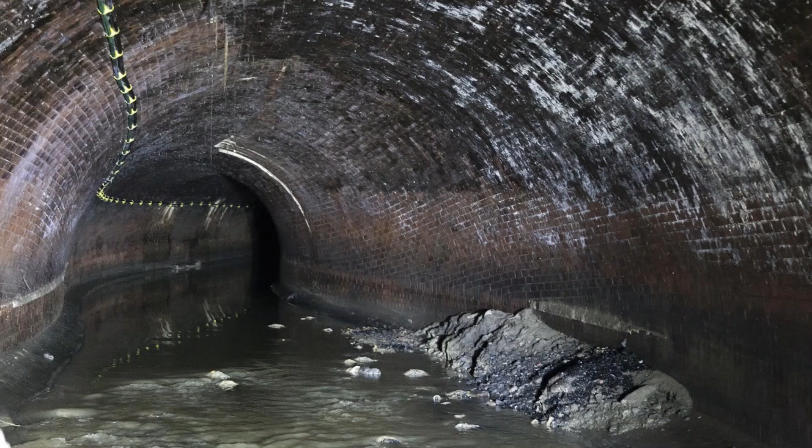Great. What about the Tideway project then? Can you tell us something about that and what your role in that project is? Yeah, of course. So this is what we're actually talking about. It doesn't look too glamorous from this shot, but these are the original sewers that currently sit underneath London and carry the waste out through into the Thames.

The Tideway project itself is a large exercise to replace the existing Victorian sewers, which were actually created back in 1858 by Sir Joseph Bazalgette. It's the same sewers that were put in then, following the Great Stink of London in 1858, when London was actually home to about 2 million people. Now, when the original sewers were designed, Bazalgette had the foresight and he created them for a population about twice that size, about 4 million people. We're now at 9 million.

The sewers have reached capacity, and this whole project is about replacing the original sewers that you see here below ground level, feeding out into the Thames, taking them down through a series of drop shafts and out through a tunnel below the Thames as part of the effort to clean up the whole area and return the Thames to a previous enjoyable state, is the way I'll put it. It's actually 25 kilometres of tunnel that stretch across the whole of London, carrying tens of millions of tonnes out and across into the outfall at the end of the Thames.

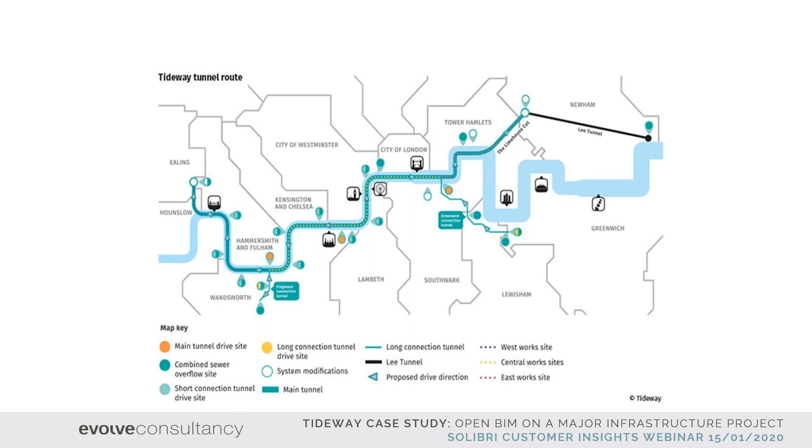It's actually divided into 24 work sites, and it's being run by 3 major works contracts. We've got a team over in the west, in the central and the east, and then also systems integration as well. So there's a lot of work going on. In terms of time frame, you can see it's got a long way to go. Construction started back in 2016. We're about here now, about 2020. So through construction, we're actually about halfway through, but there's a lot more work to go on afterwards.

By the time we get to 2022, we start the system commissioning, and in 2024, the work's completed, and actually there's a handover from the main works contractors to Tideway at the start of a 3-year period of Tideway's responsibility to maintain the assets and then Thames Water to actually operate them. The final handover of assets to Thames Water doesn't actually take place till 2027. So there's an awful lot of work left to do yet. It's a very time-consuming project. Yeah, but very interesting as well.

So you have this open BIM approach in your project. What does that mean? How do you utilize this open BIM? Yeah, so from the start, we were involved before 2016 in this. We had to look at the way the information was going to be delivered. Now, before we even start talking about open BIM, it's worth just a consideration of the size of information that we are dealing with. On the client Tideway server itself at the moment, there are over 175,000 documents, which equates to around about 1.5 terabytes of data. That's just the Tideway CDE.

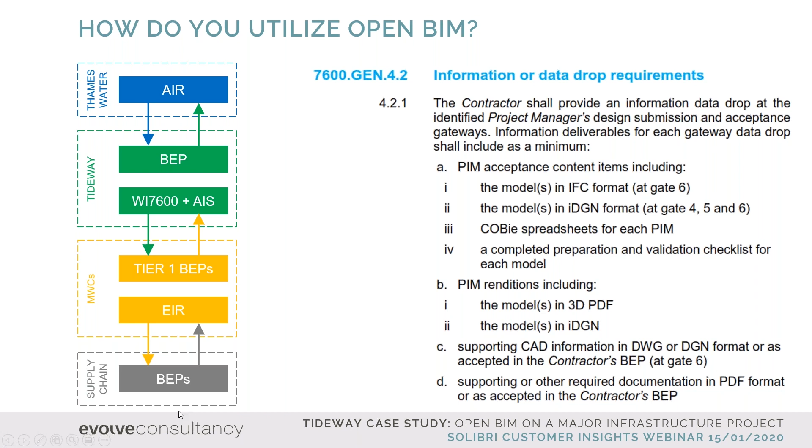Hence, we decided on IFC COBie because they are open ISO standards, and that's one of the more important things that we dealt with. We needed them to be backed by an international standard. So here's an extract from the Works Information 7600 itself, which actually describes that very quickly, and also brings into account 3D PDFs so that people who don't have the technology to understand the IFC and COBie formats can still interpret the information.

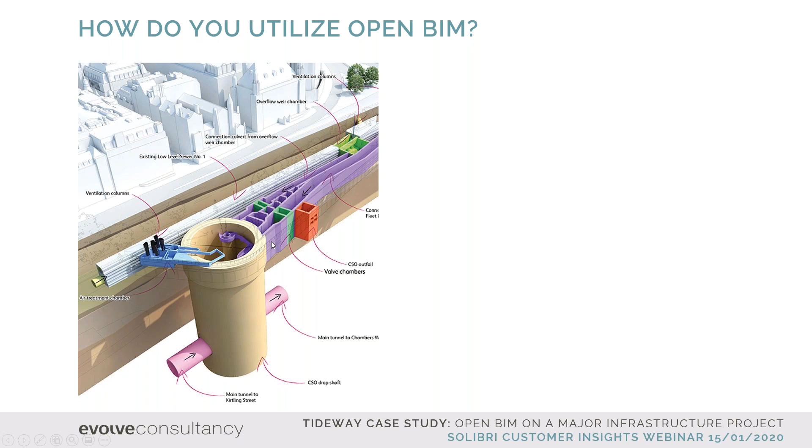Now, at this point, we started to get concerns raised back. You've all heard them, I'm sure. IFC is not suitable for infrastructure. Our software can't export IFC. IFC does not support complex geometry. IFC was designed for vertical construction. Well, in terms of what we're asking for, if we look at the project, we'll see it's actually a series of concrete structures and drainage systems.

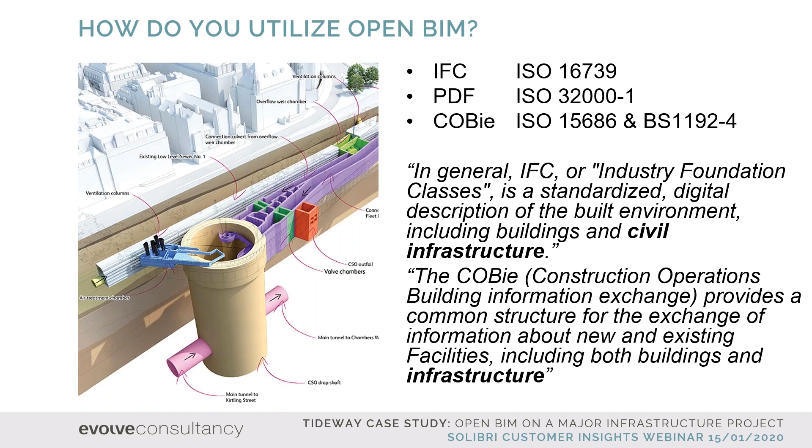And in fact, when we look back at this, the first thing we identified was that these are international standards and they are actually designed for more than just buildings. They're also intended, and these are definitions from the IFC and from COBie themselves, clearly for those types of projects. We actually did look at this, and it's interesting to note that inside of IFC there are 12 building element types, but 56 distribution elements.

And that's what we're talking about here. It is just a series of structures and a distribution system. Admittedly, it's a very large distribution system, but in the end, it is just IFC flow segments, IFC flow controllers, IFC walls. I'll translate that. That's pipes, valves, and walls.

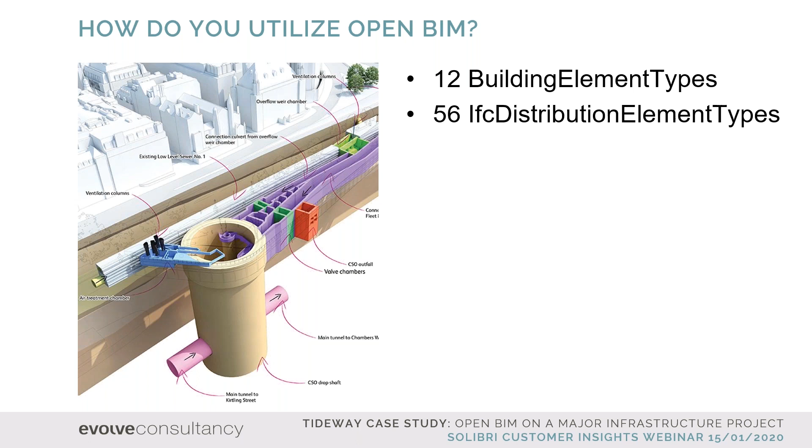Okay. So how about Solibri? In which phases of the project do you use it, and how do you use it in the project? Well, we've been using Solibri throughout the project to look at data and to analyze it. But as we've moved into construction and we're aiming now towards Gate 6 handover, that's when we're really talking about stepping up the pace and looking at validation and verification of models that are being issued to us. We're working on the client side. We need to make sure that the model information being delivered matches the documentation and particularly the asset registers that are coming in.

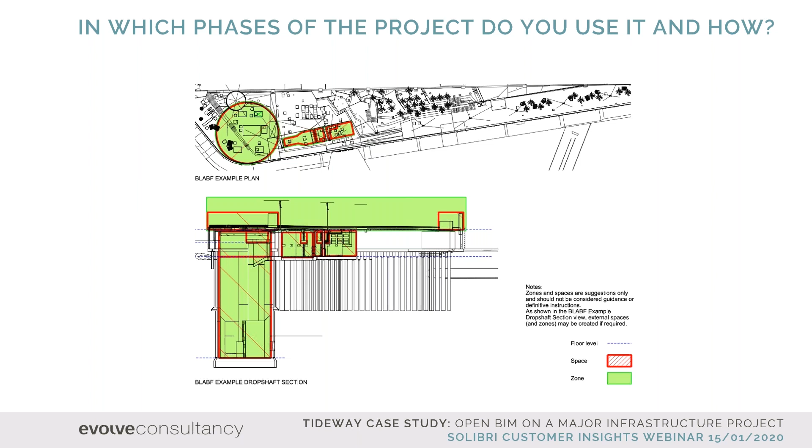Now, what we did to do that is we've broken down each of the sites into zones, spaces, floors to help it. What we could have done is just turned around to the whole project and said, there's your requirements, get on and do it. But we've realized that working towards a common aim is going to get the best for everybody. So what the client Tideway has done is produce a series of documents that help people understand how the information should be structured, not just information requirements, but guides on how we would hope the information is put together.

We're not having problems with coordinates on this project. That's one thing that we got to the bottom of right at the start, but moving through the project now, how the models are structured, how the IFC information is structured, and finally how information is going to be handed over at Gate 6, that's the important part for us.

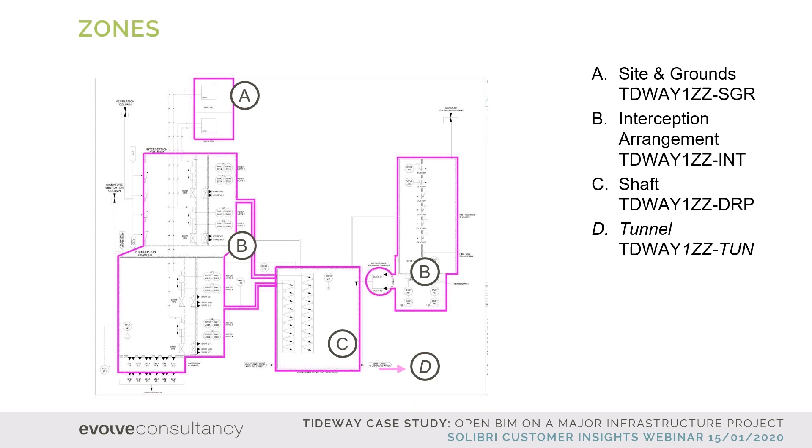This is what's important. It's the structure of the data, not necessarily the tools that have been used to produce it. So what we've been doing is working with the main works contractors, everybody involved in the project, to try and identify where things can be achieved and where things have been a little more difficult, and working through those problems. I'll talk a bit more about the process, the way we did that later, but to us, we took the original systems diagrams and we looked at them, and the way they break down into IFC structures in COBie is actually fairly straightforward when you review them in this way.

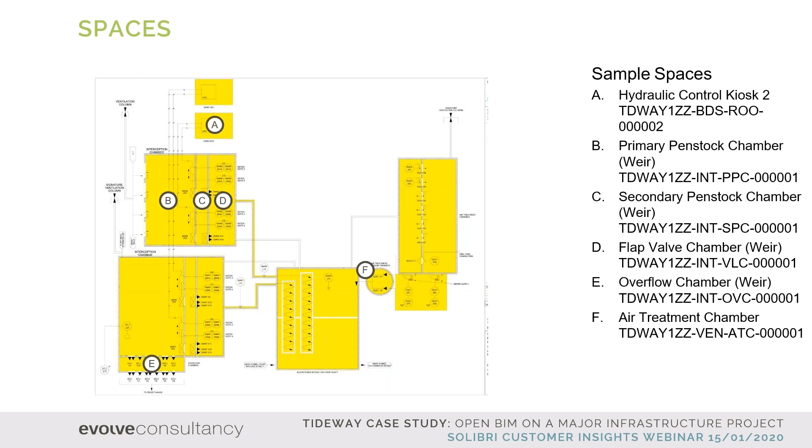This is work that we did as part of an internal review to see whether this approach was actually pragmatically possible, all the way down to the final components that actually sit in the project and are identified through the spaces. We moved on from that then, and we're starting to look now at how the asset tags need to be formalized, and making sure that they can be identified consistently across all the sites and all the main works contractors.

Now, the way we've done that is built a series of guides, as I've said, and tried to be as transparent as possible with the compliance checks that are going to be run on the project, so that they can be reviewed up front and the information that comes into us is as complete and as successful as possible. Here's an excerpt of the workflow that the models are going through. And here are just some of the validation checks that we're doing, which are a simple yes, no answer. Has the information been received? Is there evidence of the validation carried out before the information comes into us?

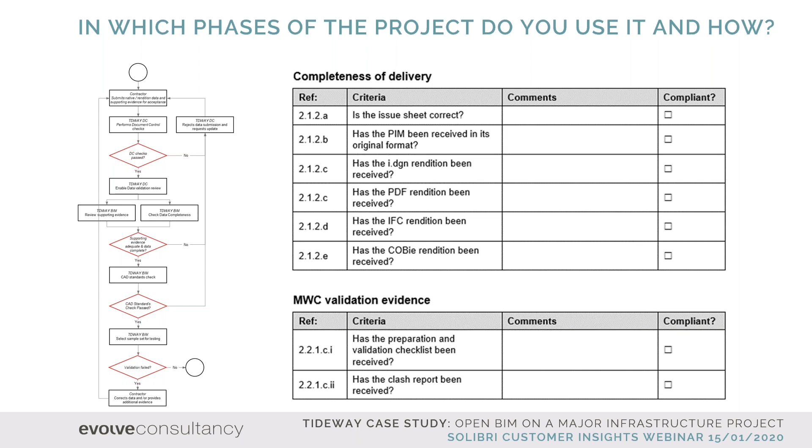What our intention is, because there's so much information on this project, is to do spot checks on the information. We simply couldn't validate everything. That's the main works contractor's role. It's their information to tell us it's correct, but we will be doing just spot checks on this to make sure that the information is complete and that the assets within it are where we expect them to be.

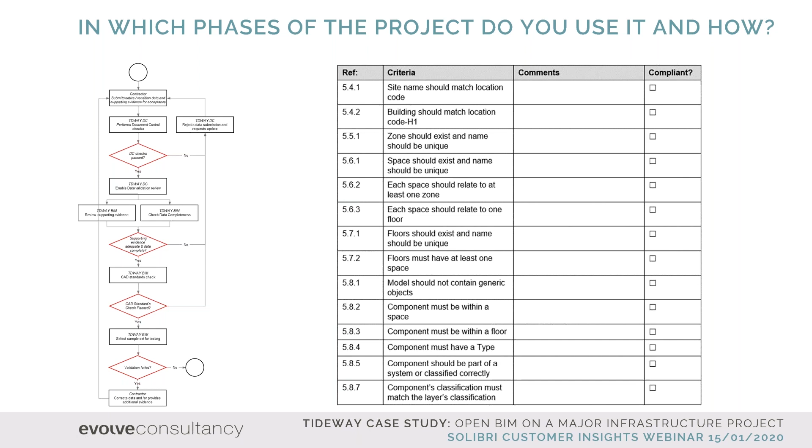Okay, so what are the benefits, what have you seen so far? Okay, the first thing I'll start with is we couldn't do this without Solibri. We absolutely couldn't. If we remind ourselves about how much data we're talking about on just the client side at the moment, there's no way even a cursory spot check could be done manually. There's simply too much information. So we've worked really hard on putting the environment together in Solibri to be able to automate the verification and validation process and tell us exactly what's going on.

And the way we've done that is through a series of collaborative workshops where we have tested this approach to destruction, is the phrase that we've been trying to use. We worked together with each of the main works contractors, worked through the information requirements and the structures of IFC, and looked at how problematic it would be to deliver it. And through those checks on the IFC files, what we were trying to identify was one of five things.

We were trying to work out whether the problems were to do with the modeling of the project, whether it's something to do with the configuration of the software or a settings issue with the IFC export, whether there was a workaround possible, whether actually, and this is the one that worried us more, there were bugs in the software that meant the IFC couldn't be produced. To be fair, we didn't find one action in these initial workshops that couldn't be resolved. What we were finding was simple things to do with the structure of IFC that are easily resolvable. Things like this example here, where two spaces are identified with the same name.

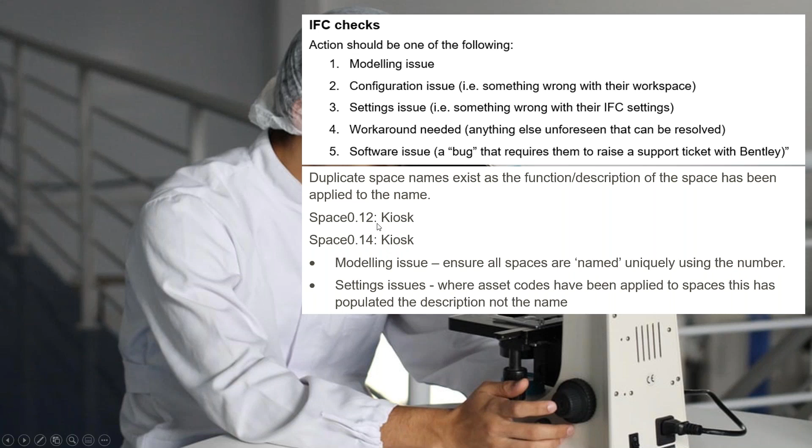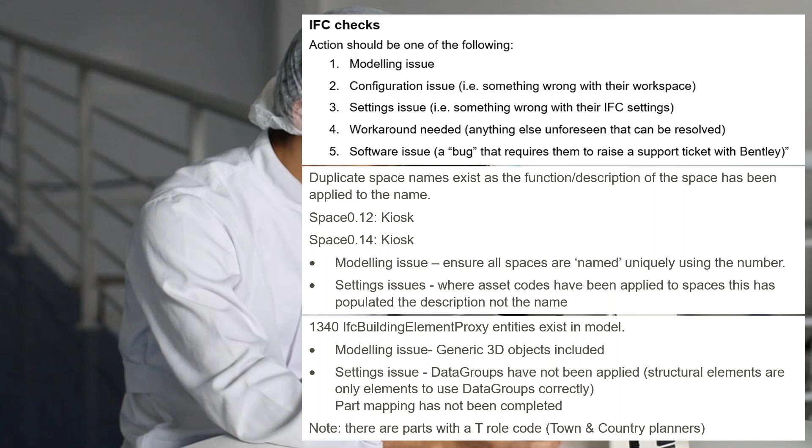We went through it, we found that most things were surmountable, and we're at the point where we're confident moving forward that it can be done. And all of this is done inside of Solibri. Just a quick summary here, as we work through an excerpt again from the validation checks that we did as part of these workshops, you can see that we come to the last one here, and a lot more of these are yeses. Still a long way to go on the project yet, but we are getting there.

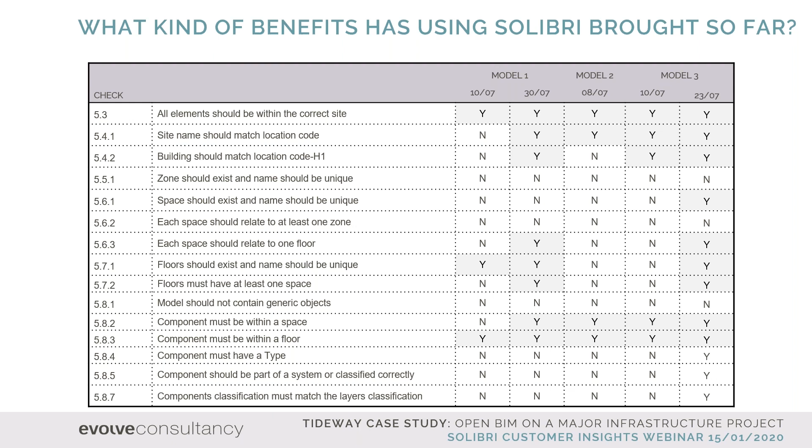So what's next? What are the next steps in the project? Well, the next steps from our side of things are the most technical. What we've got to do now is start bringing all of the asset information into the models and making sure that the handover to Thames is as complete as possible.

And the way we're doing that, without going into the standards in too much detail, is to make sure that the information requirements are, again, clear, they're understandable, and they're built into the Solibri operations. So what you've got here is a couple of what are called hierarchy codes to identify the assets within the models. What we're trying to do at the moment is map each of those to the ideal IFC entity that is used to produce those.

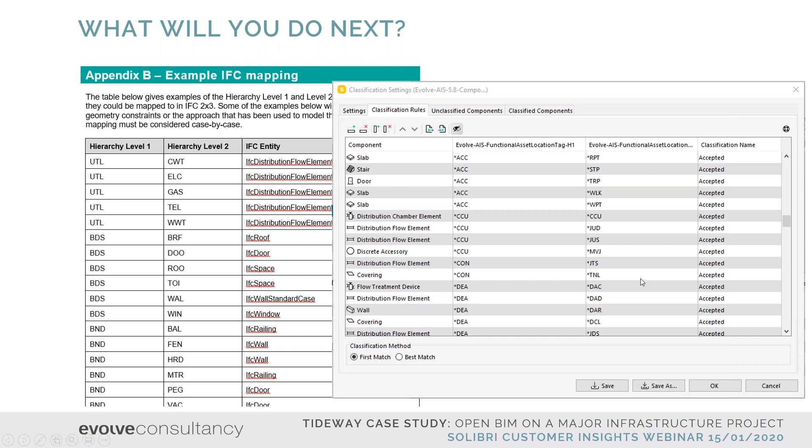That's never going to be complete. It's never going to be a one-to-one mapping, but at least there's some kind of guidance as to the entities that we're looking at. And here you'll see inside of our Solibri environment, exactly the same thing is mapped, so that we can check that the elements we're dealing with are one of the expected asset location tags, called here hierarchy 1 and hierarchy 2.

We're also working on trying to rationalize the terminology used. If you're aware of IFC and COBie to any extent, you'll know that some things are called totally different things, stories and floors, buildings and facilities being two examples. But also the asset information terms are a little bit more English in their approach. So what we've been doing is building mapping tables to make sure that the information is identifiable in each of the models.

And this, again, is an excerpt from the guidance that says, this is where we would expect things, but it's not dictated. At any time, we can receive information back. And so long as we're being told consistently where that information is, we can work with it. In the end, there are 3 main works contractors that we're dealing with. That's only 3 different possibilities, but they are working together to try and make sure it's the same information as well. We can work with it. It's not a problem at all.

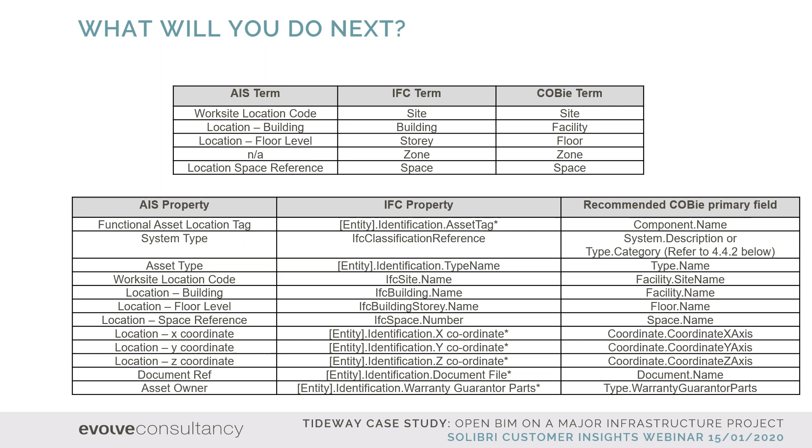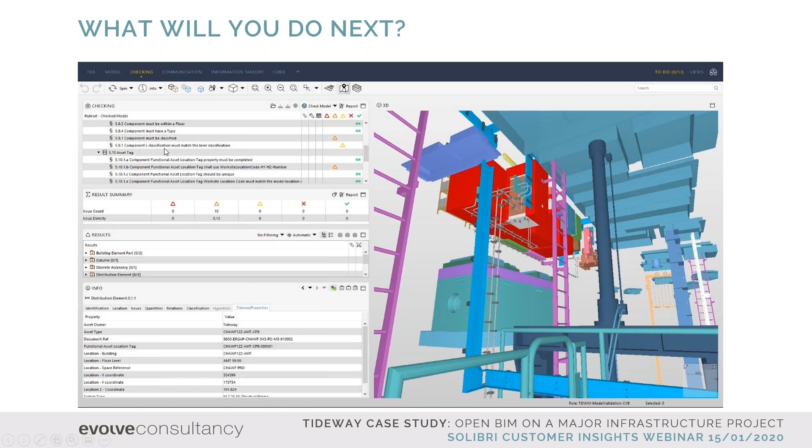So the next thing is to actually get in and start looking at these models as they work through stage 5 and work towards the handover at the end of gate 6. What we've done is built a series of classifications and checks which align directly with the documentation. You can see it a little bit here, that everything's got a reference number. But if I just jump quickly into Solibri, it will become a little bit clearer to see.

So this is a proof of concept model that we've been working with over the last few months to actually identify the asset tags and how it will look for handover. And we've got here a series of IFC and COBie checks that we're working through. These numbers here directly relate to the section in the Gate 6 compliance checks documentation that we put together, so that at any point we can refer back to it and look at exactly which parameters or properties are being checked, how they're being checked, and what we expect for compliance.

That's proven really invaluable to us, and hopefully it will be for the feedback and reviews that we give on the information when it's actually received. So you can see here under the asset tag that we've got a series of different checks that are going through to make sure that all the information aligns and is correct. There's a lot of work still to do, but it's very enjoyable. I must admit, this is the kind of thing that I really enjoy doing.

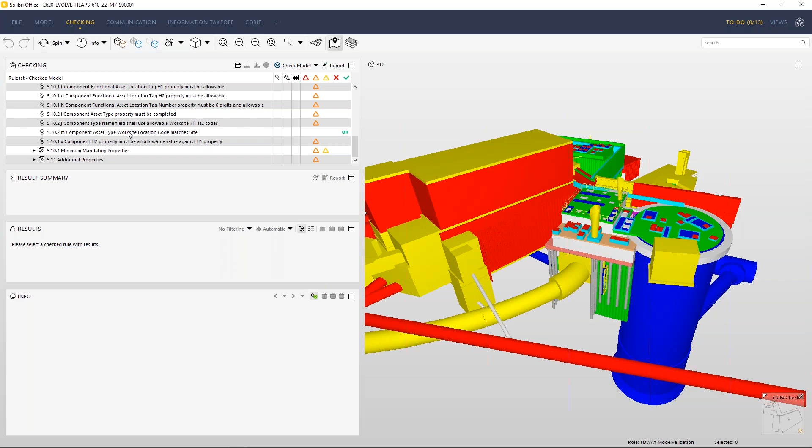Yeah, that's good. How would you summarize your experiences so far? Summarizing is pretty easy, to be honest. I think the more effort you put in up front with defining your requirements clearly, the more success you're going to get at the end. And the one thing that we really emphasize is trying not to limit the tools being used. The delivery teams are the experts. What you need to really concentrate on is understanding and using open methods of delivery to make sure that everybody can achieve the same end goal.

But it's really important to understand IFC properly. It's not just a DXF of the 21st century where you can hit a button and hope that your curves and arcs are represented well enough. There's far more to it. It's about knowing how the software needs to be set up to deliver an effective IFC.

And remember, infrastructure isn't an excuse. Infrastructure can be done. There are more challenges on certain types of infrastructure project, and not to be flippant, infrastructure covers a wide variety of projects. But in this type of thing, it's proven that actually it's not an excuse. Clearly, though, the data itself is useless unless it's validated and verified.

That's where Solibri steps in for us. And the one lesson I'd say to everybody out there is, so long as you can define the checks that you work with as clear logic, your simple yes or no's, even if they are complicated questions, breaking them down to clear logic, it's easy to automate this inside of Solibri.

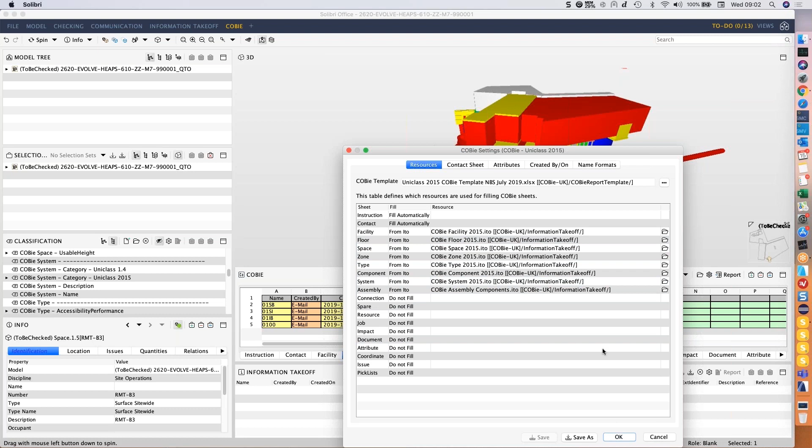So here are our ITOs, or information takeoffs, that will actually be used to deliver into the sheets themselves, and they will then push into the template, which we can define at the top here. So we can obviously edit those related to projects, or if we've got additional columns that needed to be added to the template, we can add them there as well.

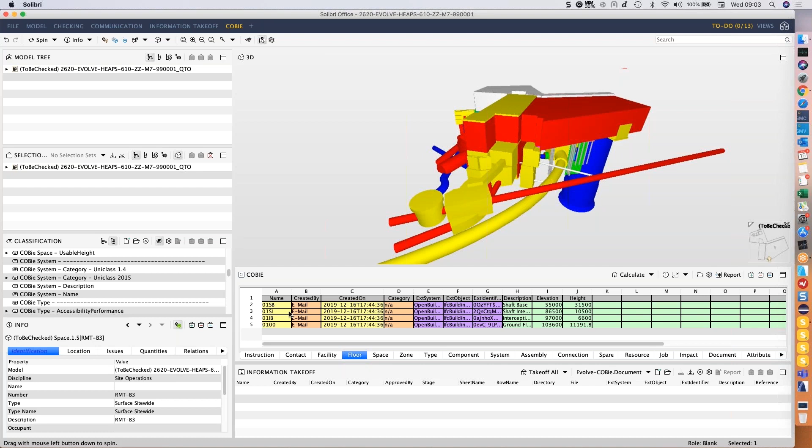Okay, so once we've now calculated it, and if we start looking at the relevant sheets here, we're now on the floor sheet, and the floor sheet will show the levels within the building. And when we click on it, it's interactive. So as we click between the different levels, we can see the types of components that are actually based on those levels in the structure.

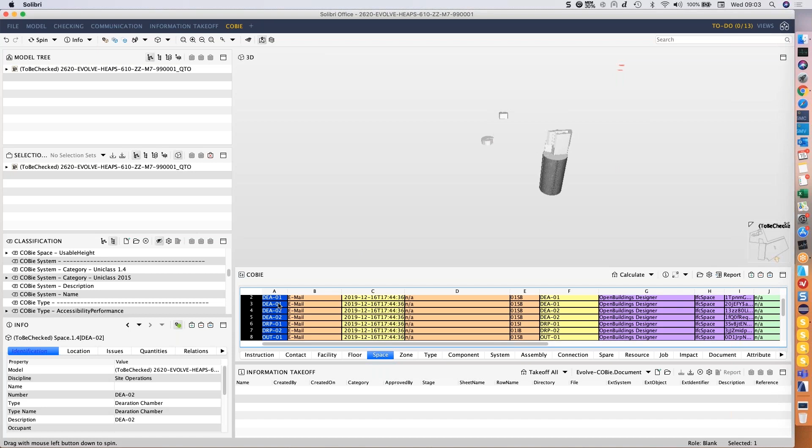Same goes for the spaces. So when we click on any of these spaces, we can see the spaces. We can highlight multiple columns or rows in the sheet. But also, if we select any particular item within the model and we want to look at the data and where that relates in the sheet, we can also use the bidirectional functionality as well to go back to the sheet to find that particular row in question.

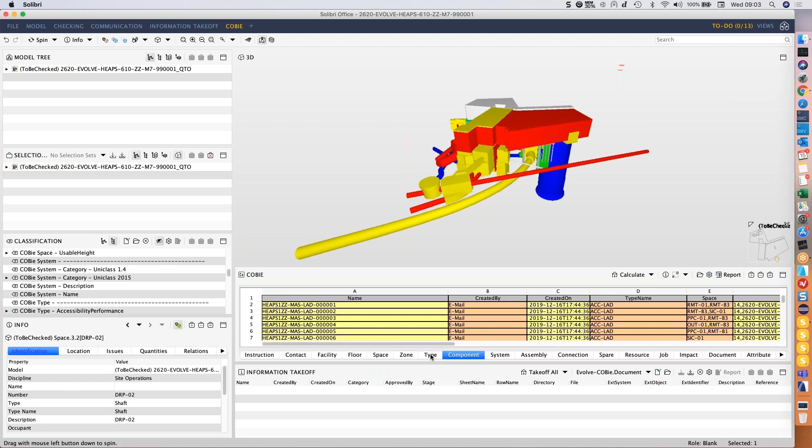If we look at the components in here, which are all related to the types and also have relationships to the systems as well, if I double click on this one here, I'll hide this first space here, and we can then look at what this component is. So we'll make this transparent, and we can see here we've got an access ladder, and the access ladder is shown as the context in the model against the space that it sits in.

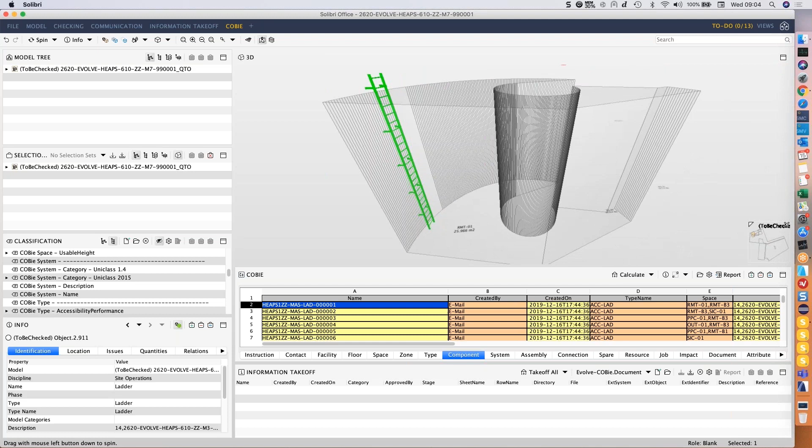We can, if we wanted to, then trace that back, and we can click on the actual space there. You've seen that we can actually look at the relevant space that it relates to by actually finding that within the model, but also we might want to know what zone that relates to as well. So we can see that's actually in the shafts area here. So very, very interactive functionality to check the data that's in the background and help you deliver that COBie deliverable. It gives you plenty of flexibility on that.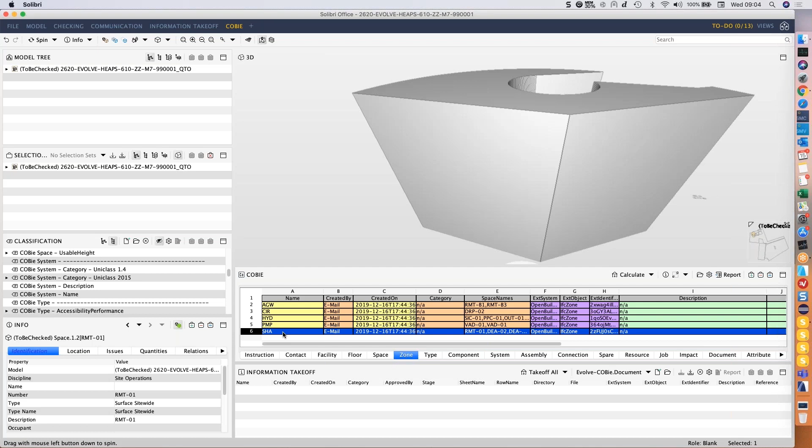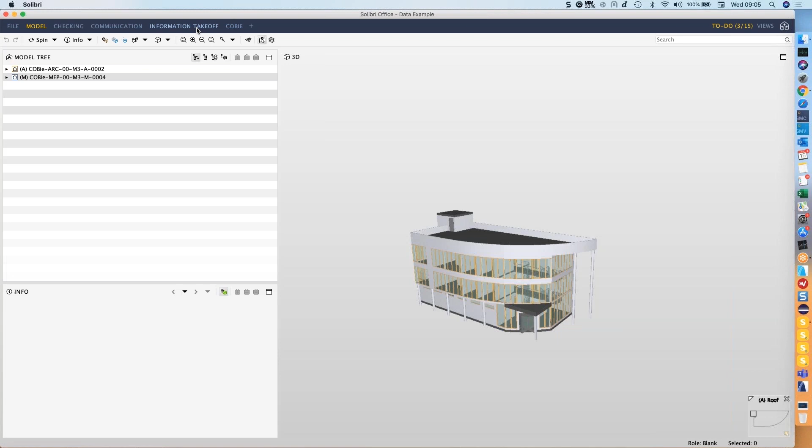What I'm going to do now is move over and show some of the concepts that sit behind that, but also from a more generic point of view. So if I go back to my recent list here, I'm just going to close this model down. And I'm going to open up this data example here, which is actually fundamentally COBie based. This is our example model, and this is the second part of the demonstration now.

It's set up, and initially we have a set of COBie assets, which show us the elements that are going to actually make COBie in this case here. And these are then used to drill down to the other pieces of data. So what we're going to do is look at the use of classifications to aid rules and to give flexibility to the users, where they might want to actually grab data from different locations, or they might want to use compliance lists, that type of thing, in order to make the rules as flexible as possible.

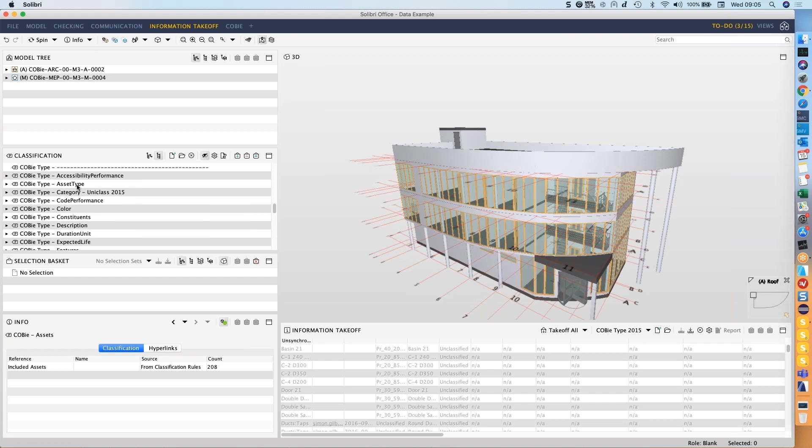So we're going to look at two particular fields here. The first one, which is the asset type, and the second one, which is a classification, which in this case is based around Uniclass, but could be based around any country's specification requirements.

So if we look at the asset type, first of all, a relatively simple field for the elements that are shown on screen. What we actually have is one of two values, which is fixed or movable in this case here. You can see that what we've got is elements that are fixed, and we've also got elements that are unclassified, i.e. they haven't had the value applied to them, or we might not have mapped them correctly.

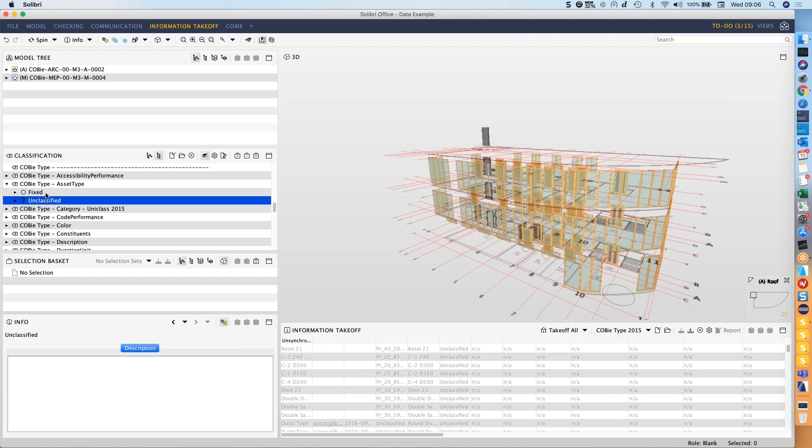So the whole idea with the classification, if we go to its settings, is that in the classification rules, what we can do is we can add a number of columns to use for a criteria function to check for different locations for the data.

So if we were delivering COBie and we wanted to put it into the location which was specified as sort of maybe a default location, although, as Nigel alluded, it's not essential to have it in those locations. In this case, what we do is we look at each component which gets pushed through to this classification, and then for each component we run through the rows in this table.

The first one it comes to, it looks for COBie_Asset.AssetType. If it finds a value there, then we use the value. So the equals actually says grab the value from the second column. If not, then we can look here, which is in the data COBie type asset. This is basically a default Revit-based field if you're using the COBie extension for Revit, if they haven't mapped their data on the way out. So in this case we've got the second row, which says go and grab it from this location.

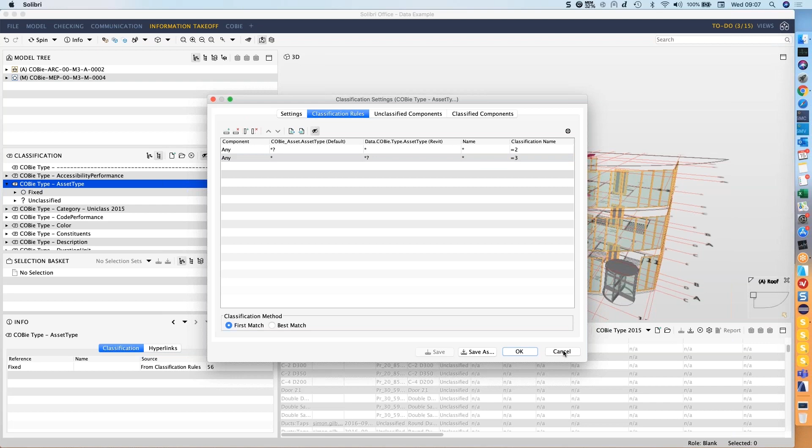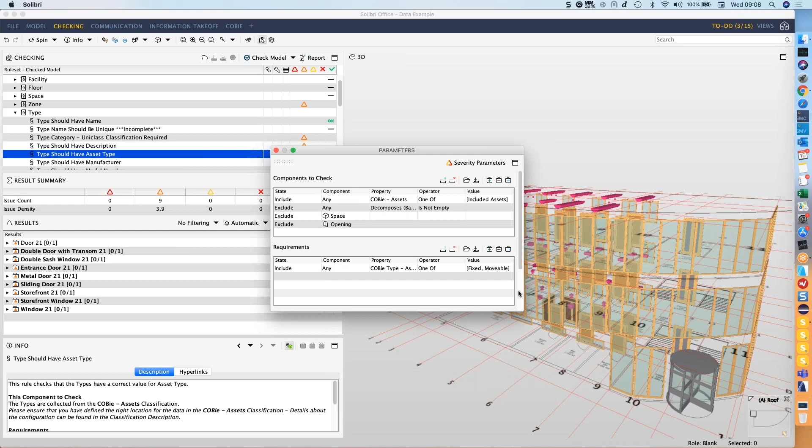Now, that gives us a combined list from different locations, which we can then use within a rule to check the data. So if we go to the checking area now and we look at the type-based fields, you can see that we have asset type here. When we open up the rule, it checks the same sets of data that are the assets. Then we can specify that this classification and the values that come from that classification have to be one of fixed or movable.

And then we break those down into the types. So the big difference here is that we end up with a list of results that are related to types in this case, rather than individual components.

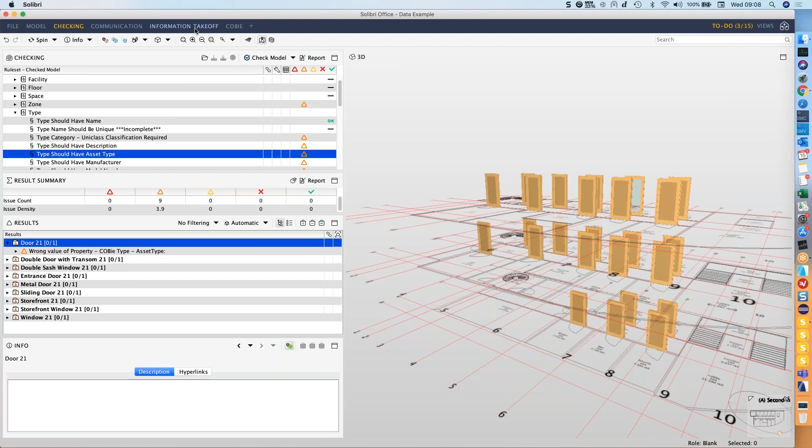So that was still a more simple version, but where we end up with a larger list, for instance, if we look at the COBie category here, we've got our product values, and this particular field requires each of the elements that are part of COBie to have a Uniclass value applied to them. In this case, a product value, and we can see from the list of items that should contain the data, we have a set of unclassified values.

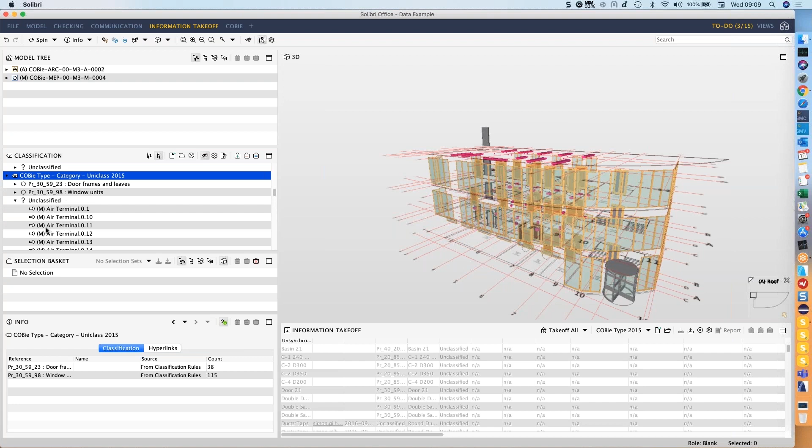When we get the unclassified values in here, we end up with a list of each of the individual components that are unclassified, not necessarily based on type. In this case, if we look into the settings for this, it's a slightly different setup. Whereas before we were just specifying the location to go and grab the data, in this case the classification is doing a large amount of the grunt work as far as the validation of the data that's there.

So for instance, we've got a set of values here, again in two columns, because we're checking two different locations where this data may exist. And then we have the valid values that are allowed for these components. Now we could break that down later on and go further, like what Nigel showed, to say these particular PR values should only be related to certain types of components.

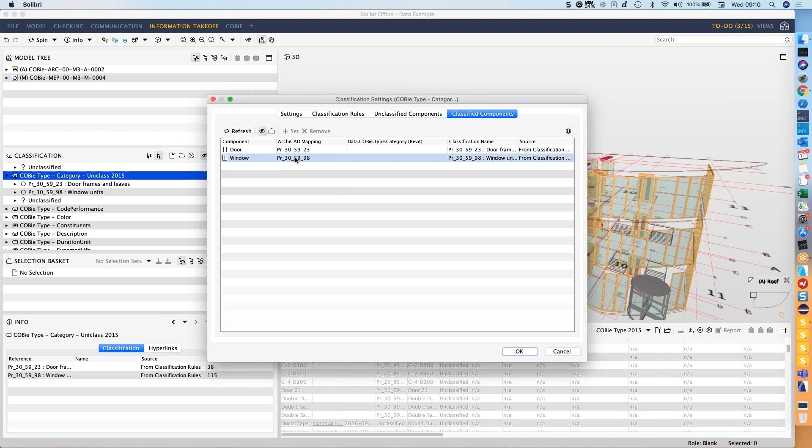If I scroll down, you'll notice it goes from the most granular down to the least granular, then the list basically repeats here. Now, in the classified areas, you can see the items that have been classified. We can see our doors and windows in this case are classified, but there's been nothing classified from the Revit model itself. Now, if I click on one of these air terminals and look at the data information that's required for it, we're checking this location in the classification rules.

And you'll notice that if I go down to the information within that area, COBie type category, we've got not available, not applicable here. But you can see they've put the data in, it's just in a different location. So this gives us flexibility to say, well, we know that consultant is placing the data there on a regular basis.

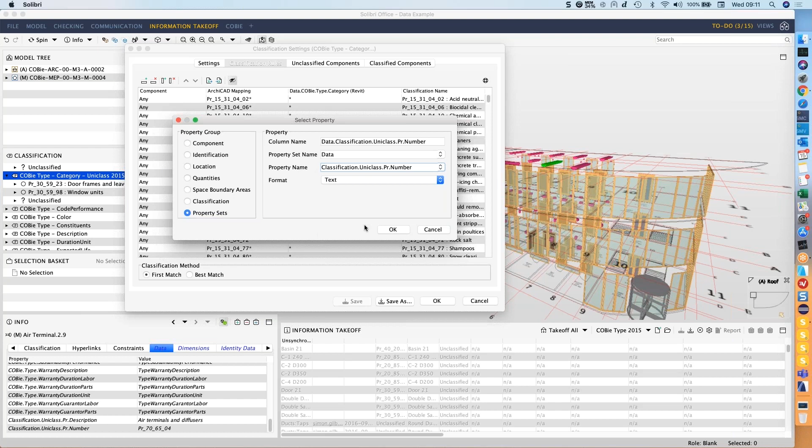So what we will do in this case is just change that location. We'll say, okay, it's still coming from data, but now we're looking at it from the Uniclass PR number value here, and say okay. Now that automatically, when we go over to the classified area, means we end up with these elements classified.

So the benefit here also is that if the tables change, so in the case of Uniclass tables, they're still in a state of flux where they're being improved all the time, or your requirements for the project change on the relevant fields that you're checking the data for, then you can obviously update those using the Excel functionality here.

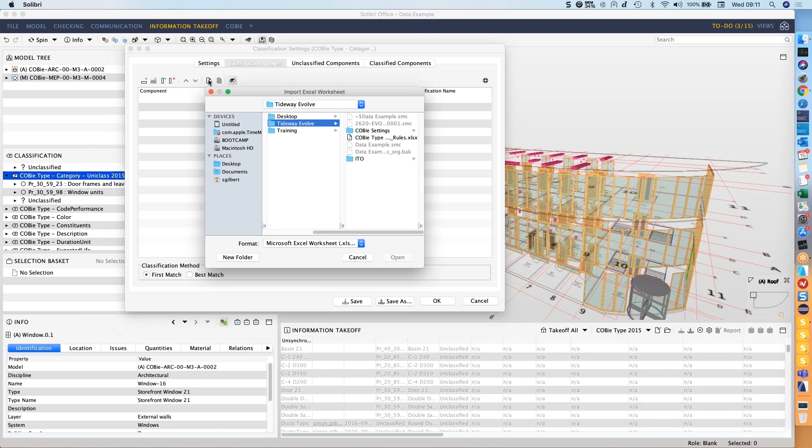So if we grab all of the data in the sheet, and I'm just going to remove it all, what I can do is use the Excel import function to go and grab that information. So what you do need is an Excel sheet with the same set of data in there that you're trying to import in. If we have a multi-tab sheet, then it would be one of three, and it would ask us to pick the tab first of all. In this case, it's now saying one of two.

So the first one is to say, okay, which column actually matches with which column from the spreadsheet. So here's our column in the spreadsheet, which is on row number 1, and this is what it's going to map to within the classification function. So as long as you name them the same, it will dynamically map. If you've got different names for them, then you need to manually map these across.

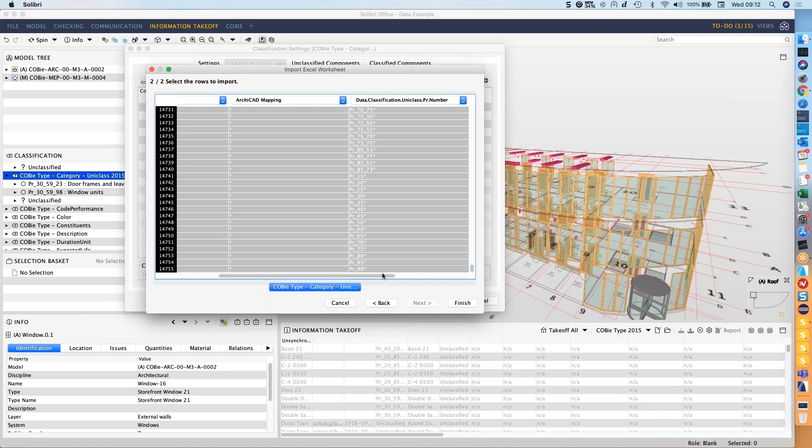Once you've gone through that mapping process, if you hit next, you can then select the rows to import. So we've selected from row 2 right the way down to this one here, 14,755. We hit the finish button and it pulls the data into that classification.

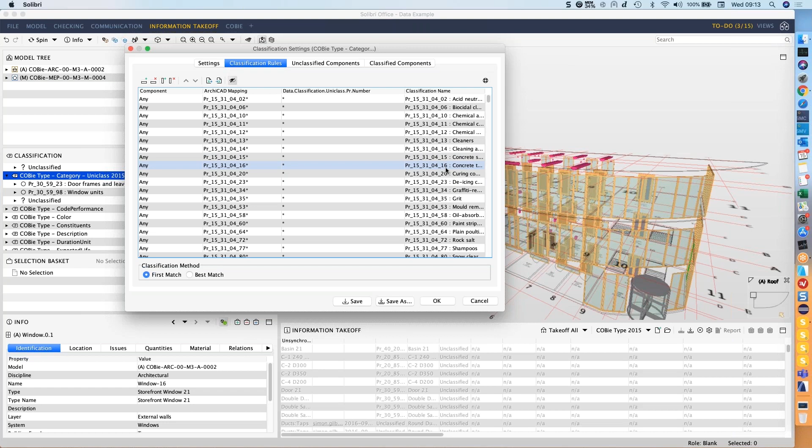So because it's using first match, just be aware that first match means that it will go through the table. Once it finds a match, it will then apply the classification name. And in this case here, you saw with the example that Nigel gave whether or not it was accepted as far as the criteria. In this case here, when it's accepted and it has a value, we're giving it the concatenated version of the name and the reference of the two parts of the field that make up Uniclass.

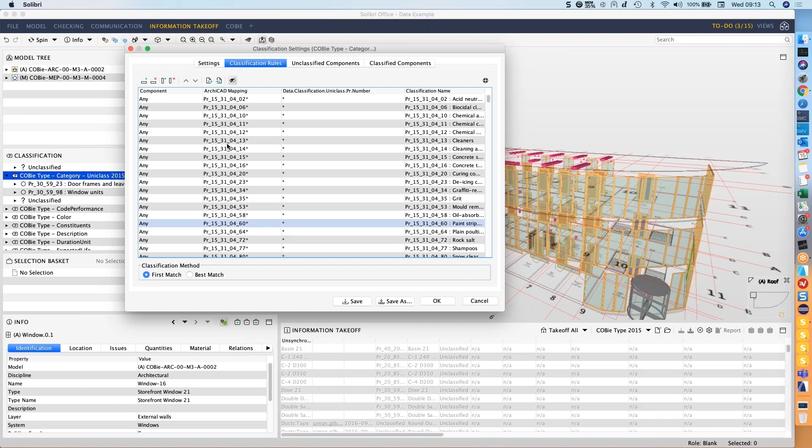Whereas best match would run through the whole table first of all until it found the best match on the relevant columns. So always try to use first match if you can, because obviously it's much quicker. And then in the settings table here, we also have this show unclassified, which gives us the ability to actually see the elements that are not classified now.

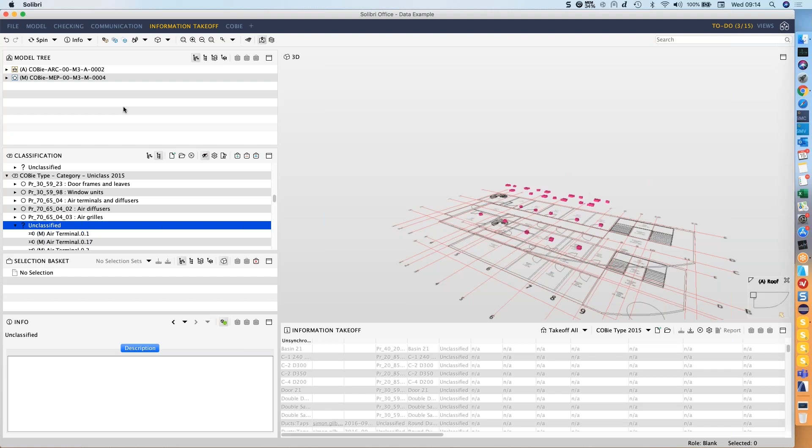So when we click on OK, you can see now we've got a larger list of these values, whereas before we had just the doors and the windows. Now we've got the air terminals, but we have an unclassified set of data of these components that are still missing the information. So if we go back to our checking area now, and I hit check the model here, and I click on the category for the Uniclass, and then I look at the rules now. The difference is that the classification is doing all of the work.

So we've got our data where we're saying these are the elements that we're going to check, which is the same as the classification. And then we also have the requirements. Now the requirements can be really easy. So we say include any component that is from this classification, and we're saying it must be defined. Now, defined means it's classified. You'll notice that you can do is undefined as well. And the idea behind that is that you can actually check undefined or defined sets of elements. And then again, we break those down to type.

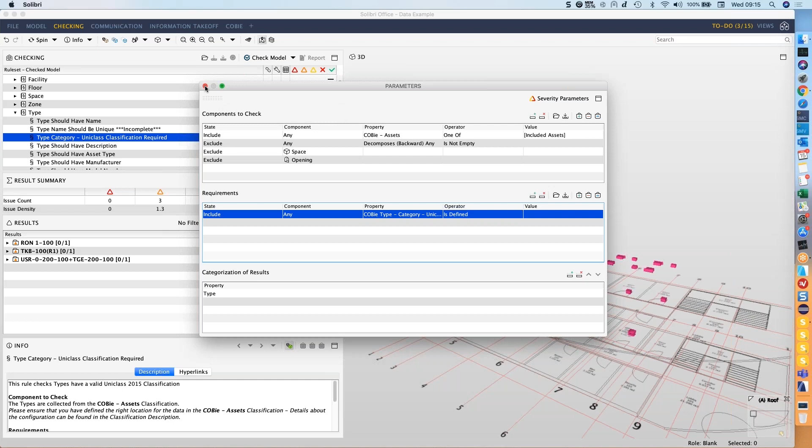Now, the idea with this is that the rule can stay static, and you can change the inputs and allow the classification to do the actual work, because you wouldn't want to be putting the value lists into this list here. So it makes the rules really focused on just delivering what the classifications are doing.

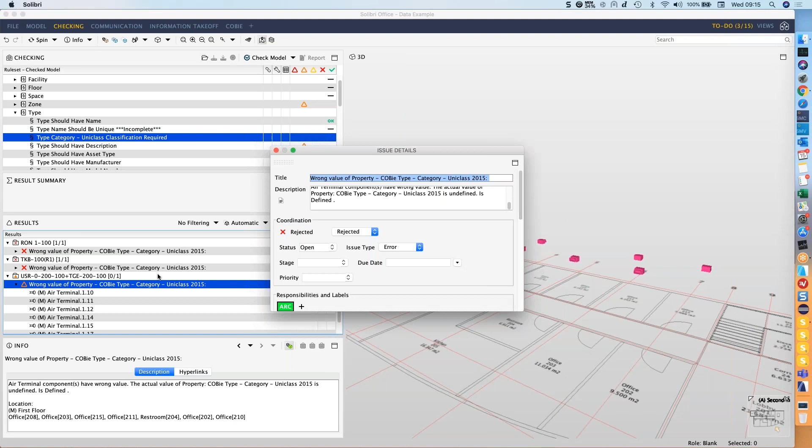And then what we end up with is the ability to create the relevant slides, in this case here, for those elements that are missing the data, in order to communicate that with the consultants to actually fix those problems. So we'll just create the last one here, and then what you can do is right click on make a presentation.

By making the presentation, we can see that we've created the relevant slides that are linked back to the actual rules, so we can check whether they've been completed or not when we get the next iteration through. And we can then report those via BCF, or we can synchronize them to any of the issue management servers.

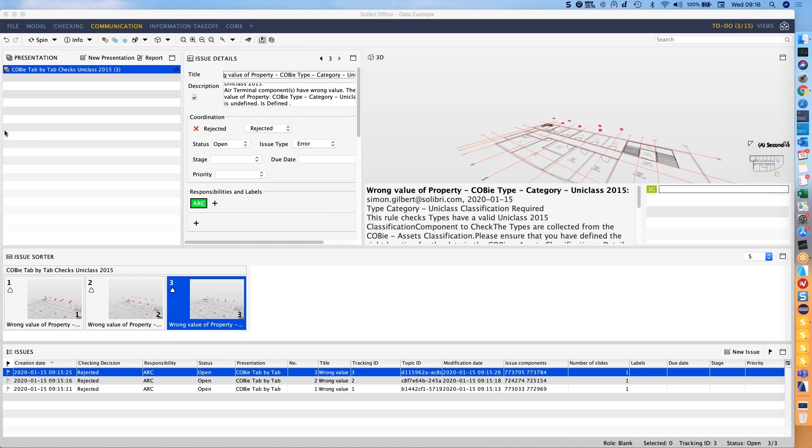So what we have here for Nigel: you have produced a lot of documentation in the project, like the guidance documents and all that. Can you estimate how long that has taken you in the project doing all that documentation? Great question. Putting into context, we've been working on the project now for 7 years, 6 years. This documentation has only been produced recently and it's being developed as we go along.

In terms of hours of time to put it together, it's not a great deal in respect to the size of the project. We were talking a couple of days to get the documentation together. It's stuff that, as you're doing the work, falls together naturally. All we're really doing is recording what we're putting into Solibri, in terms of the checks, we are just recording them in the document. So a couple of days per document, I guess.

Making sure that it's authorized, there's all the checking side of things to make sure they are complete. And of course, there will be updates as we go through this next phase and identify exactly how the asset tags are going to be delivered. They will be updated, but it's not a considerable amount of effort, not at all. Are there a lot of pages in those documents? Some of them are. If we take the information requirements out of the picture because they need to be produced at the start, they vary.

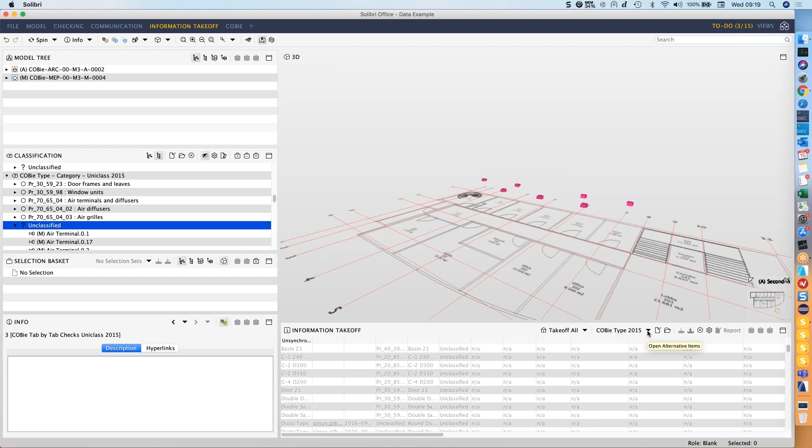Okay, so basically the functionality we're looking at here is the information takeoff functionality. Essentially it gives us the ability to list any kind of information, and that's what we've just shown within the COBie delivery function. It gives us the ability to load up any amount of the different definitions of these, so they can be generic or they can be very basic.

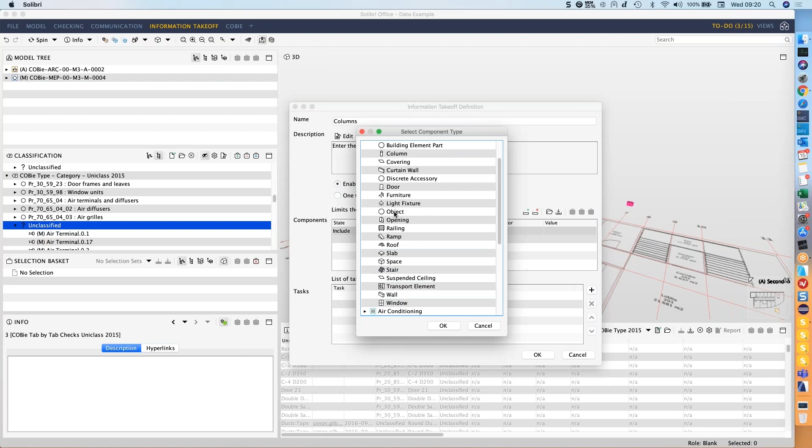So if I take you through a very basic example, if we create a new information takeoff, and I want to grab, say, columns, I can narrow this down to individual elements or relate it to more generic components. If I grab columns, I can also enable grouping, which means that if the data in the sheet is the same, it will try and group those rows together. Or if we did one component per row, it splits those out into individual rows.

So if I say okay to that, what it will do automatically is it will go through the actual model, grab anything that is a column in this case here, and then show us the type and the count and the number of these values. So by default, it gives us a very basic structure, which is like just those 4 columns. But you might want to then say, okay, well, I want to add another column in because I actually want to grab some quantity data.

Now, in this case here, we're going to use the quantity information that's been generated via the import functionality. So we have 2 sets of quantity information. The first set of quantity information is basically generated via Solibri based upon the geometry we've imported. And then we would have property set information as well, which would be base quantities in here. So if we go up to the top here, you'll also notice that we have our base quantities, and the base quantities are generated by the authoring piece of software. I'm going to grab them from our quantity area here.

Now, you might want to do a comparison between those two values just to check that we haven't got anything wildly different between what we've calculated and what the authoring system has calculated. So in this case here, we'll go and grab the length of those columns. Now, we actually want the height of the columns, but the value is called length, but we can change that if we wanted to. So we can call this column height. So you don't have to have the same name as that defined within the system. So now we can see we've got column height in here.

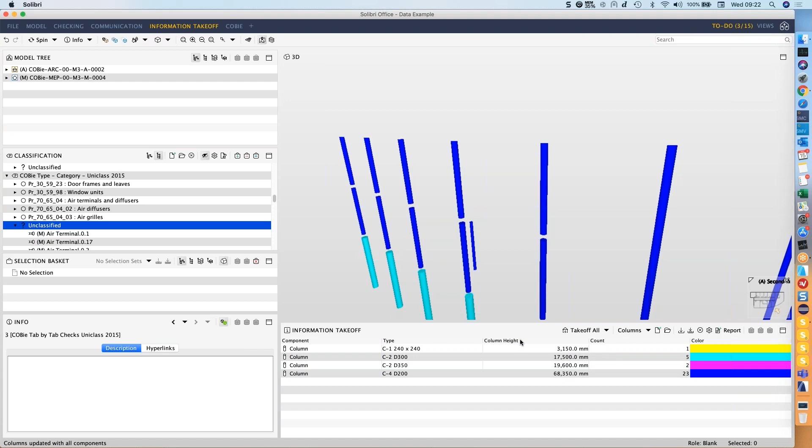Now, when we do a takeoff, it runs through that and tells us what type of those columns we've got and the values. Now, based upon the column height itself, it's doing a summation of those values. So when I double click here, you'll notice I've just copied the header so I don't have to retype it again next time. But notice that it's doing sum. Now we can have maximum, minimum, or average, and it'll work out those for us. Or we can say, let's group that value. Let's paste the value back in again. And this is probably a little bit more of what you might want to see.

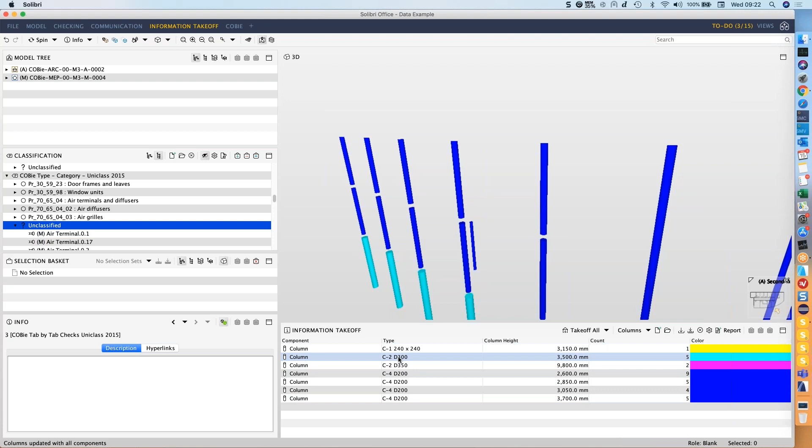So what it's saying is for this particular row here, these particular columns, and again, interactive, when you double click on any of these, you can see those values. It's telling us that of these columns here, we've got 5 of them, and each one is at 3.5 meters. So hopefully that answers a little bit of the question as far as the basics of how we would carry out information takeoffs.

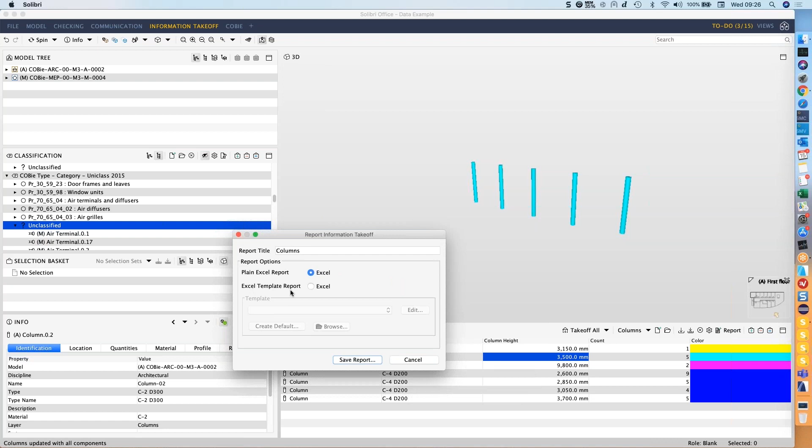Okay, so the answer to that question is yes. So the report functionality here on the end gives us the ability to export that sheet. When we hit the report button, it gives us the ability to use a plain Excel report or an Excel template report. So if we do a plain Excel report, first of all, we'll save that report and we'll just put that onto my desktop a second here.

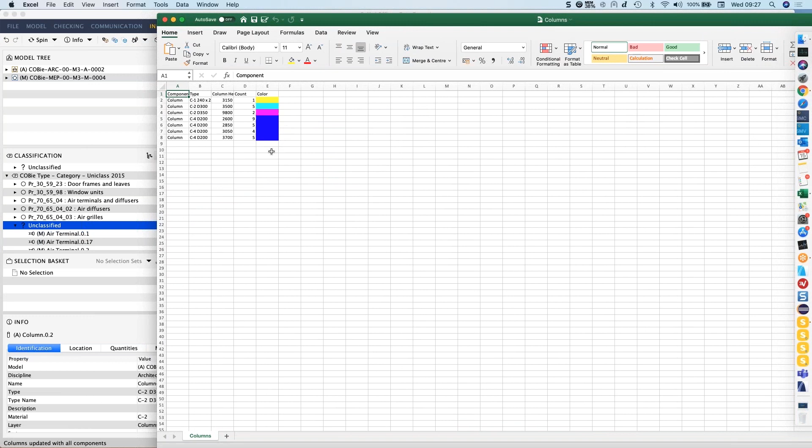That should fire up Excel in the background and actually produce the export. So hopefully you can see this on the screen? So we can see that what we've got is an exact replica of the data that's actually within the model itself. Now, when you hit the report function this time, you can actually use a template, so something that you've already pre-processed in Excel.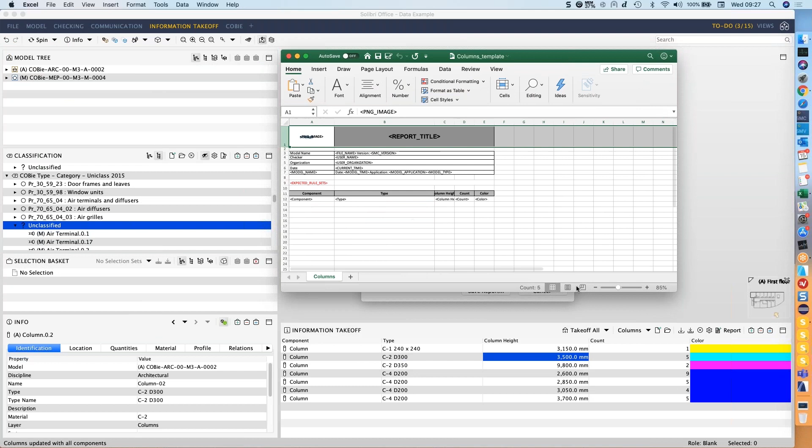It might have additional functionality and extra sort of functions and calculations within Excel that you're using. So if I say create a default template, and we'll stick that on the desktop as well, the difference with this one will be that it grabs the actual values. Whether I can actually zoom in a little bit here, let's choose, there we go. So hopefully that's a little bit clearer.

So what this gives us is the ability that you set up your information takeoff first of all. You can then go and put in your own images and your own sort of headers and information to do with the actual model itself. Anything in brackets basically are the fields within Solibri, and it doesn't stop you then actually creating functions which use these fields and add additional data, so that what you're doing is pre-populating information into a template, which would then drive other functionality

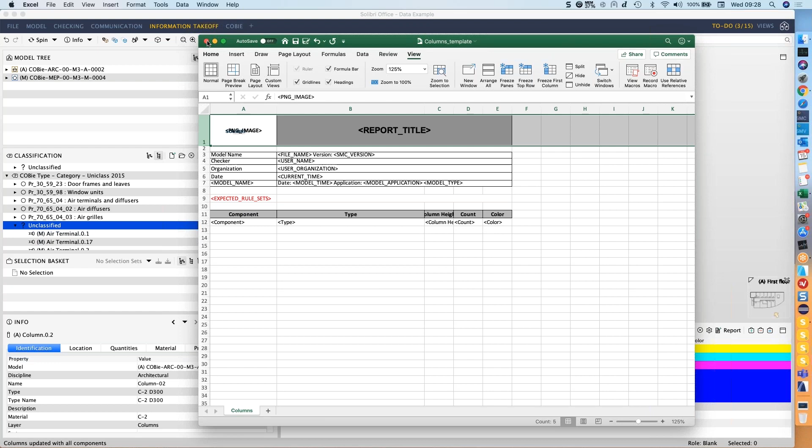based upon that information. So in essence, yes, you generate the data from the report functionality for that particular information takeoff. Hopefully that answers the question. Thanks a lot, Simon.